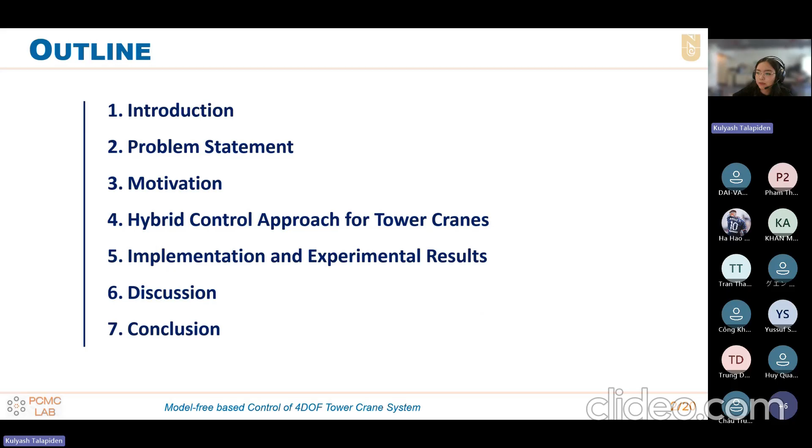Okay, so the topic of my research is neural network-based adaptive input shaping for payload oscillation suppression of tower crane systems. My name is Kulyash Talapiden. Here's a brief outline of today's presentation. First we'll begin with the context of the tower crane system and the key challenges they have. Then we'll define the problem statement, discuss the motivation behind exploring model-free adaptive control methods, and the proposed method, a hybrid control approach for tower cranes. Then we'll see the implementation for the system, experimental results, provide discussion, and give a brief conclusion.

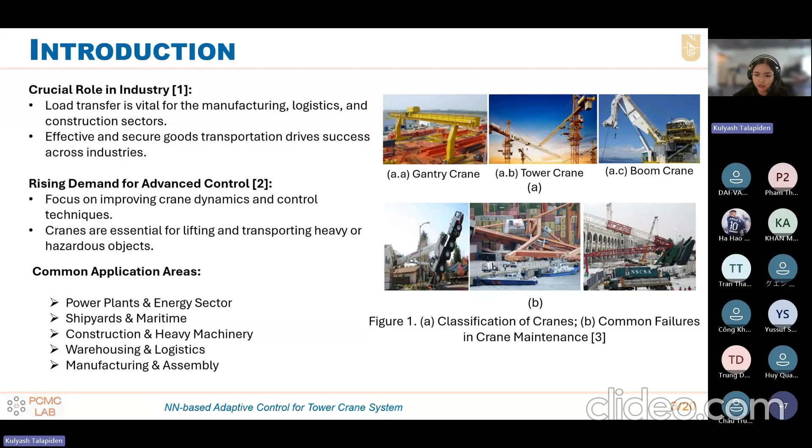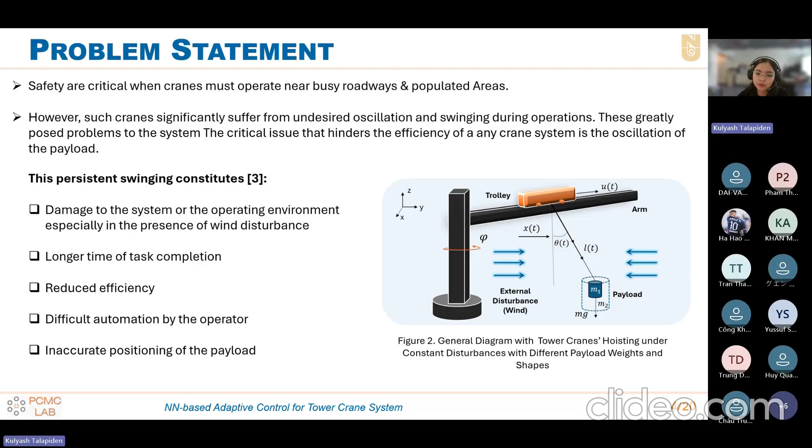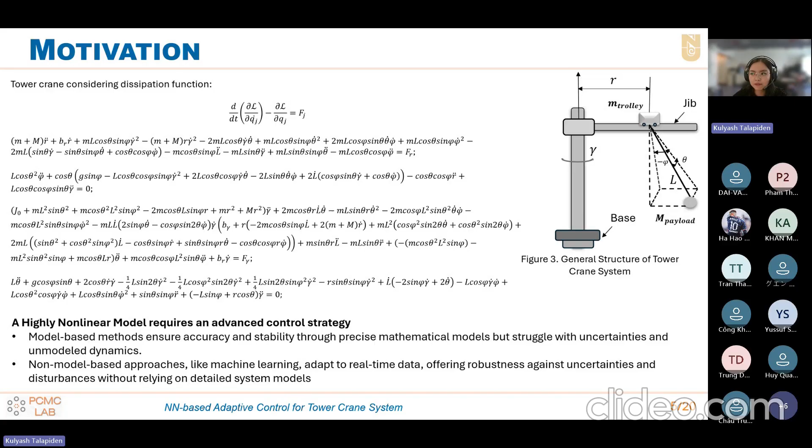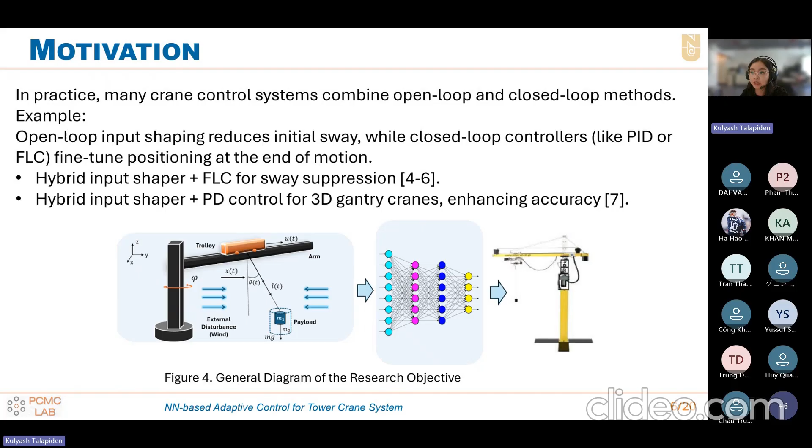So in practical operations, purely open loop control and closed loop control are combined, because open loop control can suppress the oscillations effectively. However, closed loop control can provide the precise positioning of the trolley and the jib. That is why current research focuses on the hybrid input shaper using fuzzy logic controller and also the traditional PID controller, which is easy to implement.

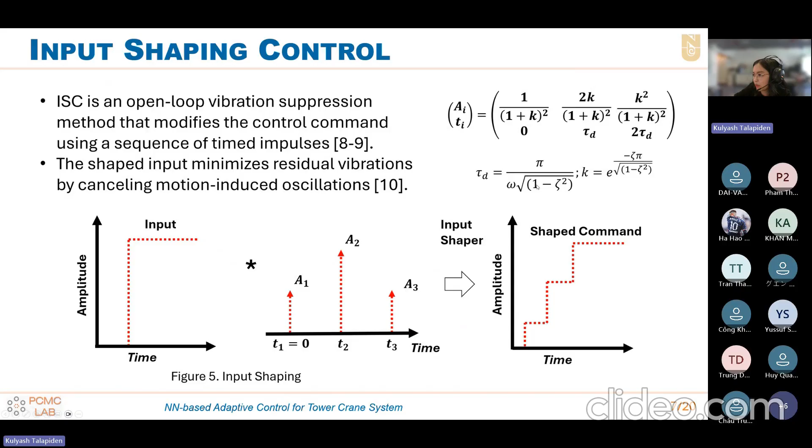The basic one is zero vibration input shaping, made with amplitude and time delay. A more robust version is zero vibration derivative, which we implemented in our case, and it can provide some robustness for model uncertainties. The shaped command can be seen in the following figure.

However, the effectiveness of the input shaper depends on accurate knowledge of the crane's natural frequency, which changes with the hoisting length. Hoisting is the process when we put our payload at different heights.

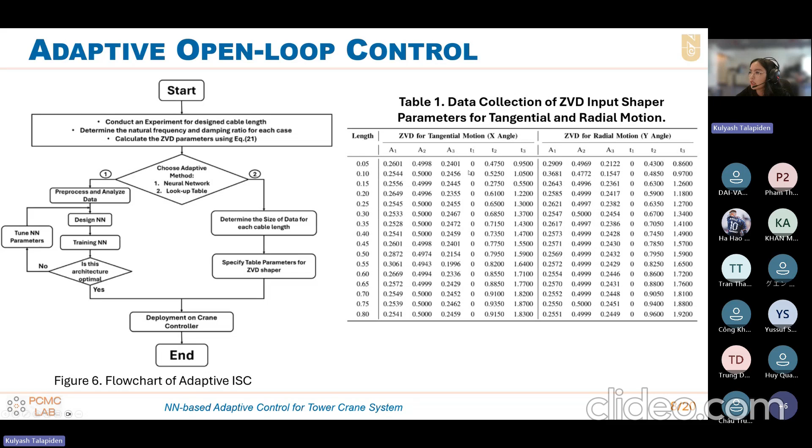Before the adaptive technique was implemented, we first conducted experiments in which we collected data for each cable length from 0.05 meters to 0.8 meters, the parameters of our tower crane. We calculated amplitude and time delay according to the previous equation, determined natural frequency and damping ratio, and then designed our neural network and lookup table.

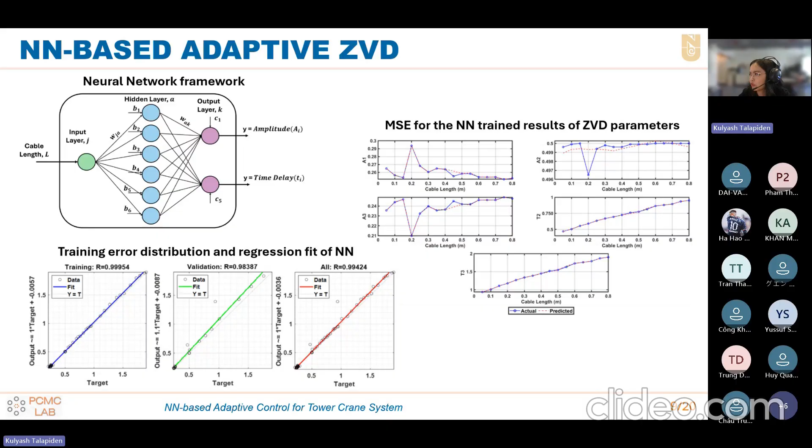Overall accuracy of 99% was achieved. On the right side, you can see the mean square error for the neural network of input shaper parameters, so you can see it can quite well find the parameters of the shaper.

Here is our experimental setup, in our Power Conversion and Motion Control laboratory at Nazarbayev University. Our experimental test bed is a 5 degree of freedom tower crane equipped with 5 resolution optical encoders, achieving 4,096 pulses per rotation and swing detection down to 0.015 radians.

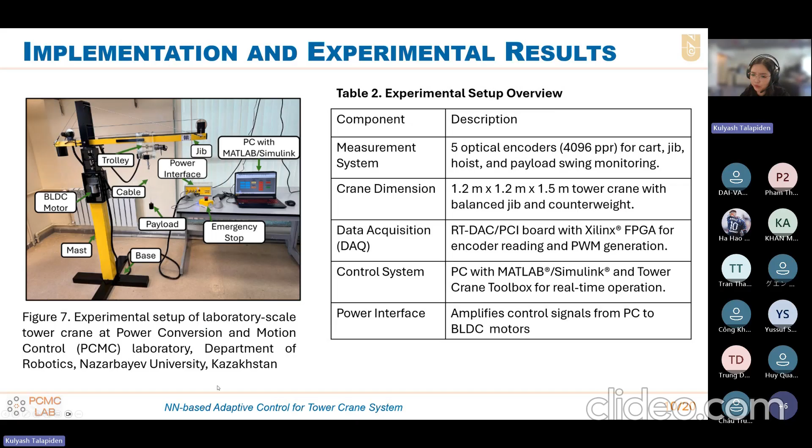The control system is built around an RT-DAC board and embedded FPGA, and this setup is equipped with 3 BLDC motors and emergency stop switches, ensuring operator safety during real-time testing.

Firstly, we compared with the traditional open loop control existing in the literature. Some of the literature already focused on adaptive control providing the input shaper. We compared 3 methods: average travel length, which is also one of the methods in which we can design an input shaper based on the average length.

For example, here you can see that we ran our experiment from 0.1 to 0.5 cable length. So we designed our input shaper at 0.3 to also provide robustness, according to the literature.

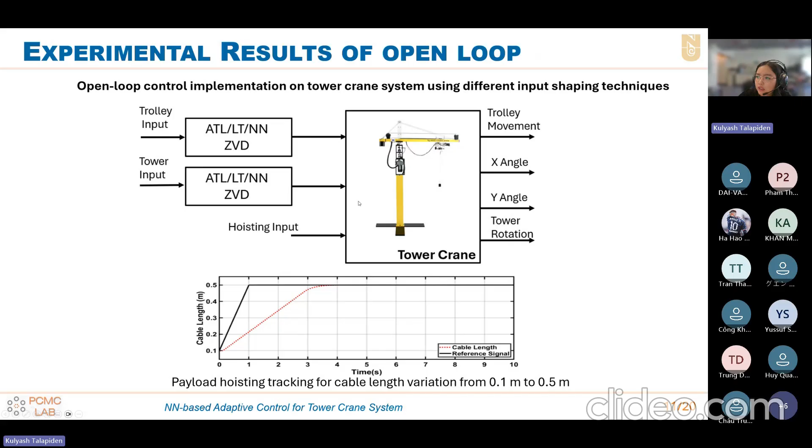The next methods were lookup table and neural network. The inputs for the system were trolley motion, tower rotation, and hoisting.

From the following figure, we can see that open loop cannot provide precise positioning for the jib. We gave an input of 0.79 radians, and for the trolley we provided 0.7. So neither the trolley nor the jib could achieve the desired position.

However, we can see that swings were suppressed effectively using all 3 methods. Here we compared this with the 3 main cases in which the crane operates. The first one is the trolley position, in which we compared trolley and hoisting motion.

All 3 methods show good performance; however, the better one we can see is the neural network.

In the next case, we compared with tower rotation only, in which we moved the tower to 45 degrees and compared the oscillation in X and Y angles. The next one is case 3, with simultaneous trolley displacement, jib rotation, and payload hoisting, where the lowest swing is shown with the neural network on the right side.

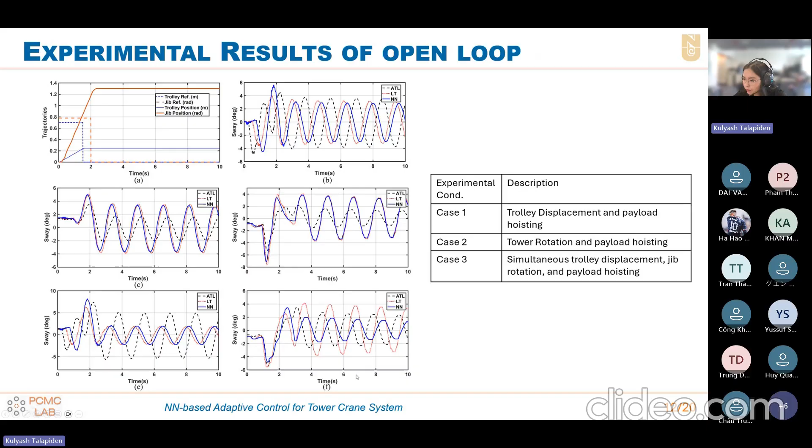As we saw, open loop control cannot provide precise positioning. In this research we focused on hybrid control, in which we combine PID control for closed loop position control, and for open loop we use the input shaper with an adaptive mechanism.

On the right side you can see the tuning parameters. For each case we needed to tune for each method.

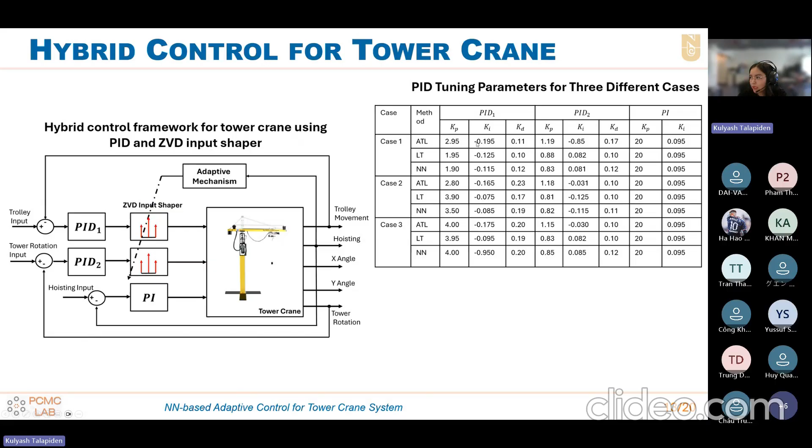Here you can see the experimental results of hybrid control. From case 1, we can see that our trolley can now follow the reference and provide performance correspondingly, with low oscillation close to zero for the neural network in each case. Especially for the complex motion, the neural network provides almost zero oscillation during 10 seconds, which can be seen in case number 3.

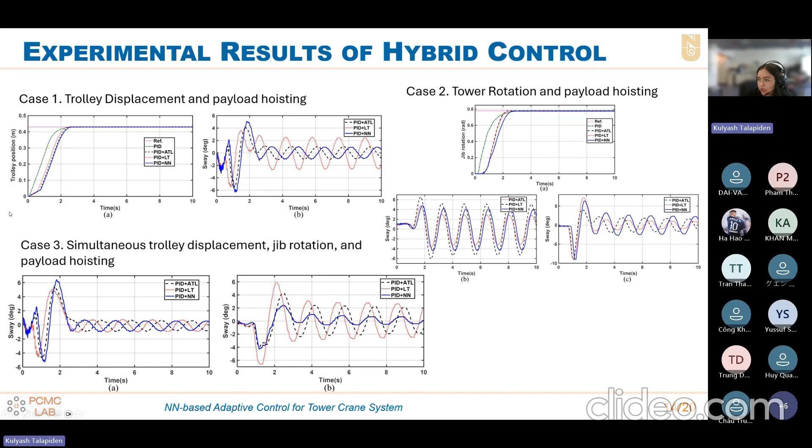Here I wanted to show the experimental results with no control, where we tried to rotate it 45 degrees; however it couldn't provide good results, and the oscillation with no control is quite high. But with the neural network, almost zero oscillation in both X and Y angle can be seen on the right video.

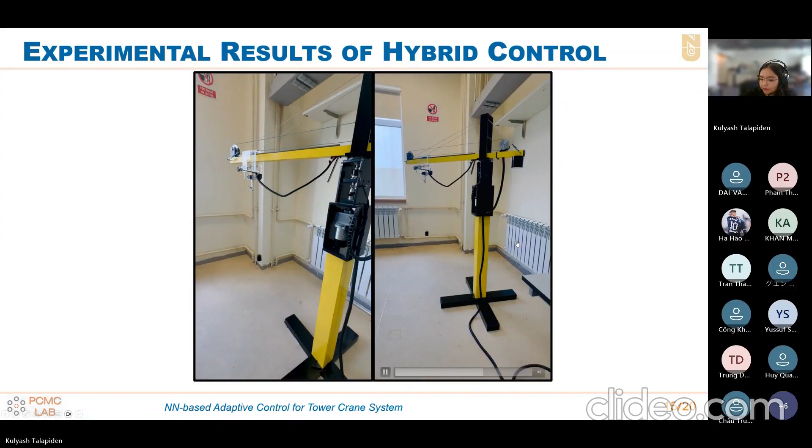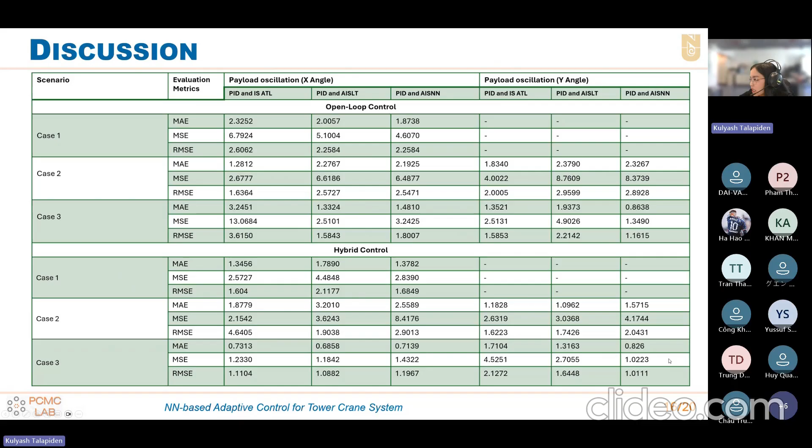In order to provide a comparison between open loop and hybrid control, error evaluation using mean absolute error was conducted. Here we can see very low error for case number 3 using PID plus adaptive input shaping control with the neural network.

In this research, we compared 3 adaptive techniques combined with closed loop control under different crane motions. Overall, it can be concluded that all 3 methods provide good results. From the right side, for the last case, the neural network and LT approach show the least oscillations; in terms of y-axis the neural network is best, and in terms of x-axis LT shows less oscillation.

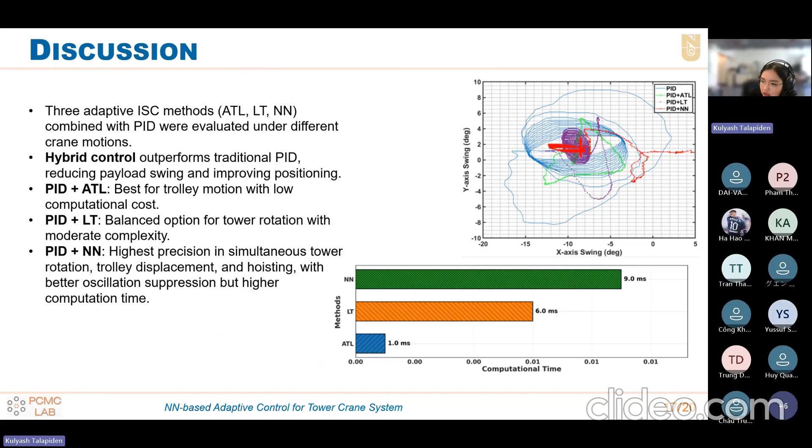In addition, to show which methods are optimal, we checked the computational time. Overall, for small, simple motion like tower rotation, we can use the lookup table and ATL approach. However, for high precision operation and simultaneous tower rotation with trolley displacement, neural network with PID provides better response despite the high computational time.

So here again is the conclusion of the presentation. Overall, tower crane remains challenging because it's an underactuated system with non-linear dynamics. Open loop control can provide good sway reduction; however, it lacks precise positioning.

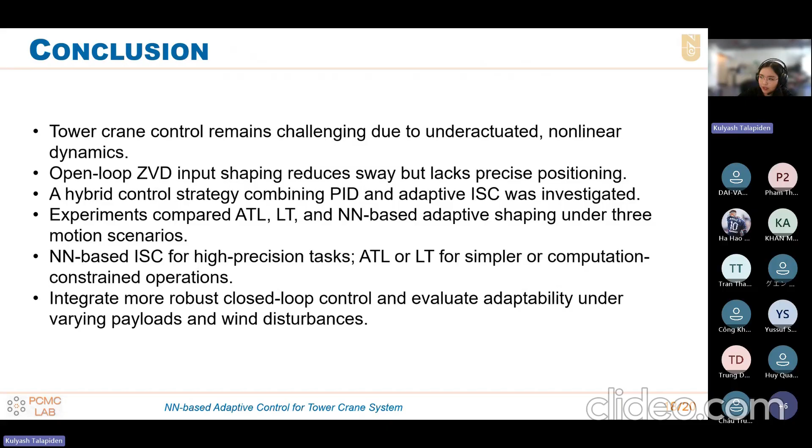The hybrid control can be implemented with an easy-to-implement PID control plus adaptive input shaping. Experiments have been conducted for this research, and overall we can see that the neural network can be used for high precision tasks, and for simpler motion, ATL and lookup table can be used.

Here's a reference list for this presentation, and thank you for your attention. If you have any questions, you can ask.

Okay, so can you see still my screen? Yeah, I see it. Okay, thank you very much, Ms. Kulyash, for the presentation.

Anyone can raise your hand or type a question. Okay, I invite Chau Trung Tinh. Good morning everyone, good morning class. I am very happy to hear your presentation, but I have one question.

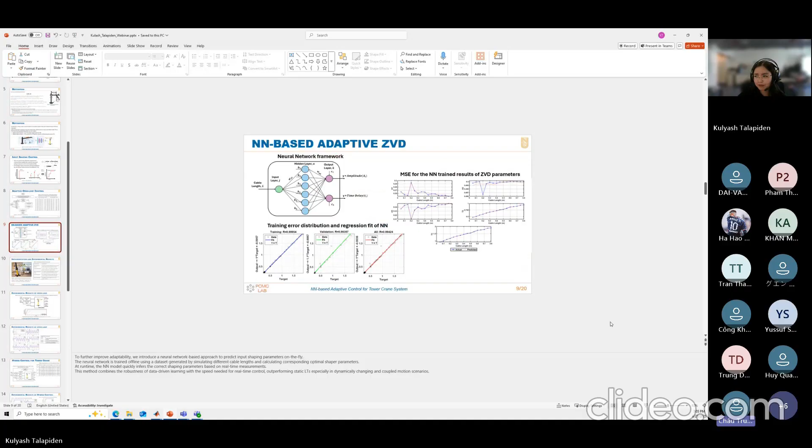I understand that when we apply the neural network to the control system, the network will approximate the system characteristics. However, there is always an approximation error. In your design, what strategy did you use to minimize the impact of the approximation error on your system, to improve performance and stability? Thank you.

Okay, sorry, can I clarify the question? Are you asking about the architecture of the neural network? What was the process of that?

Yeah, sure. So while we were training the neural network, first we were dividing our data set into training and validation, then checking with the mean square error. We compared with the real value that we saw from the data set. From the plot, you can see that it almost captures the exact parameters for the real shaper.

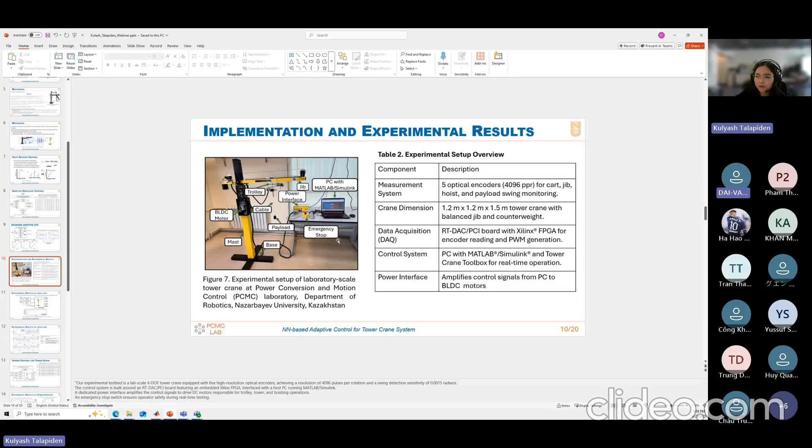How sensitive is the neural network to measurement noise or sensor error, and how does it affect the system? Because I think this system has many sensors, and if one sensor has a problem, how does that affect the system?

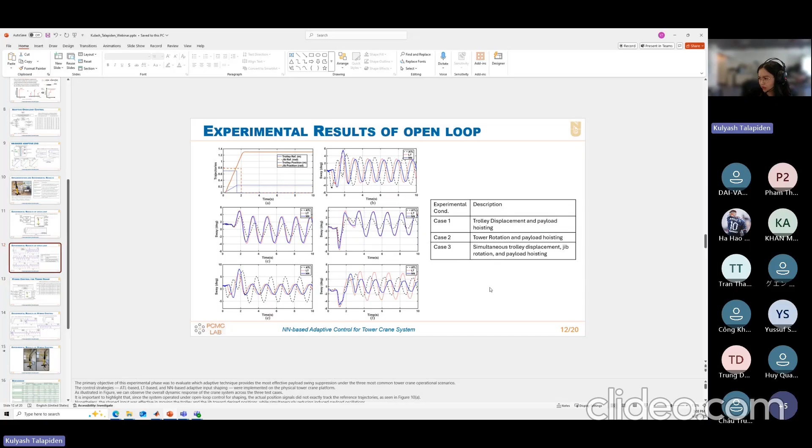Okay, but I will check the question. Possible. The system errors were quite low, as I remember from the experiment, what I saw, but currently I cannot answer this question precisely.

You selected the input for the neural network model. How did you choose the input? The input to the system was cable length, because in this research we were focusing on the hoisting process, which is widely applicable to industrial and construction applications. So cable length was the input to the system from the data set that we collected. From each length, we collected the data with the corresponding natural frequency and damping ratio.

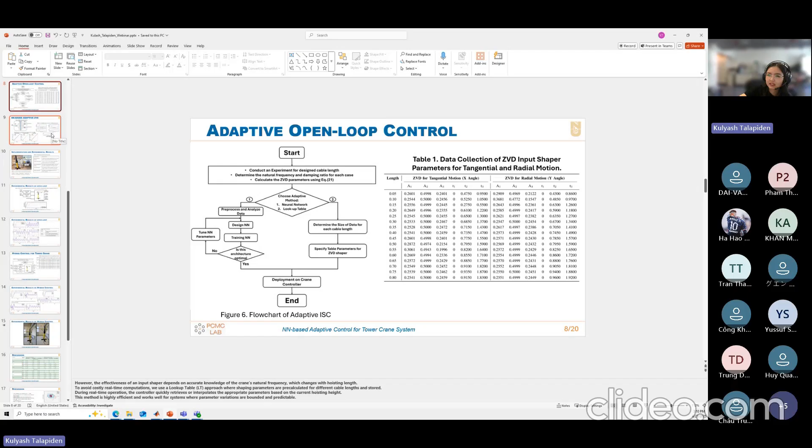I use early stoppage for the epochs to prevent the overfitting. This is in my code. Okay, thank you.

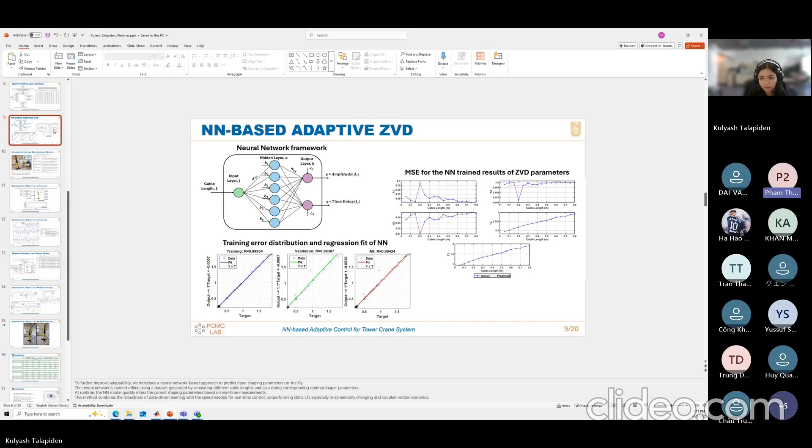Okay, thank you so much for your presentation. My name is Dev, I'm from Hanoi University of Science and Technology. Regarding your topic, as I know, we have to do 3 steps: the first is developing the model, the second is finding the path planning, and finally designing a controller. So now in your topic, you are focusing on the controller design. I want to ask about the previous steps: how can you develop the model, and how can you find the path planning for control?

Okay, so in the beginning I mentioned that due to the model complexity, in this research we were focusing on model-free-based control. That is why we used a PID that we tuned, and also an input shaper that doesn't require any model, just the parameters of the shaper, which we determined from the experiment where we collected the natural frequency and damping ratio, shaper parameters for the open loop, and that's it.

But I want to ask about the reference path. Is the reference optimized? Should you optimize the reference path before you design the controller?

I checked from the literature and found the common reference that is used for tower cranes, so I used that.

Okay, so as I know, if the path is optimized, the controller is very easy, and the controller could be much easier to design when the path is optimized, as I know. Okay, thank you so much for your answer. Thank you for the questions.